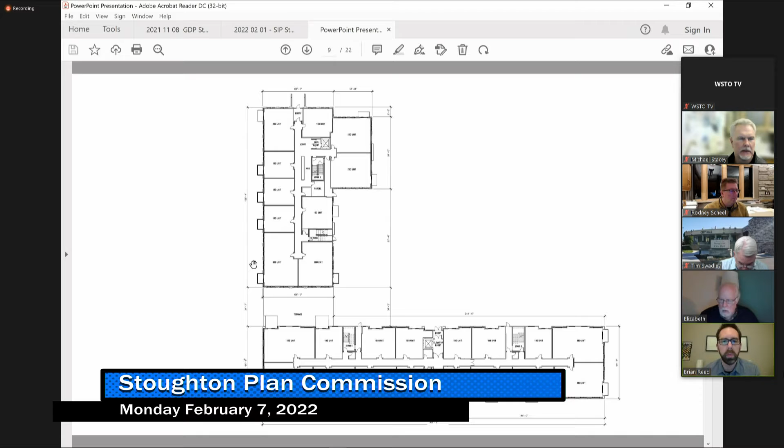The units and the building organization really haven't changed. So again, there's 30 proposed units in building 1 with the 48 units in building 2. They're pretty straightforward for the most part. The majority of the units have their own outdoor balconies or terraces if they're at grade. There's a couple that do not, but they can take advantage of the shared terrace space.

On the roof plans, we've tried to group some of the proposed mechanical systems along the spine of the building, in particular along building 2, to maximize the potential area for the photovoltaic solar arrays, so they can cover as much of building 2 as we can accommodate. And then there's some small areas where building 1 can also handle some future photovoltaic systems, dependent upon the solar orientation and solar studies, if it dictates that.

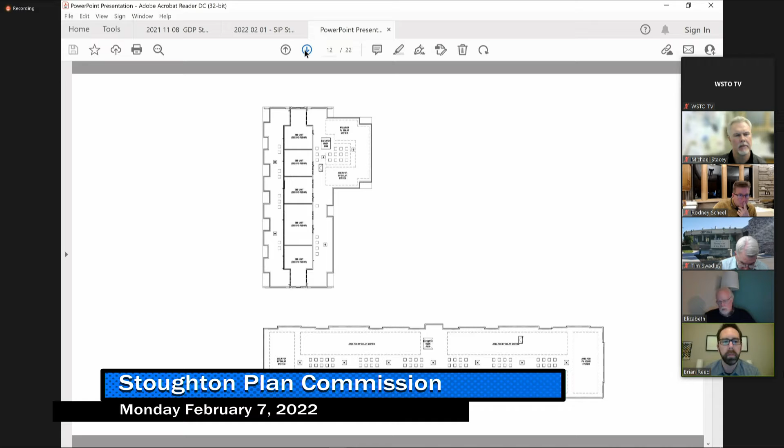So I'll show some of the imagery of the buildings. The buildings are composed primarily of brick with some fiber cement accents. This is building 1 from the corner of South and 4th Street. Again, I think the intent with this building in particular, as well as the development as a whole, was to try to create some imagery and aesthetics that recalled the industrial nature of the site. So this being the blacksmith building, as we're referring to it, has a warm reddish orange brick that has quite a bit of range to it, and then some areas of fiber cement siding on the upper floors.

Let's see. Can you just highlight the signage on that awning? Because that's the one point of discussion that we'll have later, and I just want to highlight that for the commissioners now, if you can. Sure. Yeah, so it's kind of hard to see. Let me zoom in a little bit here.

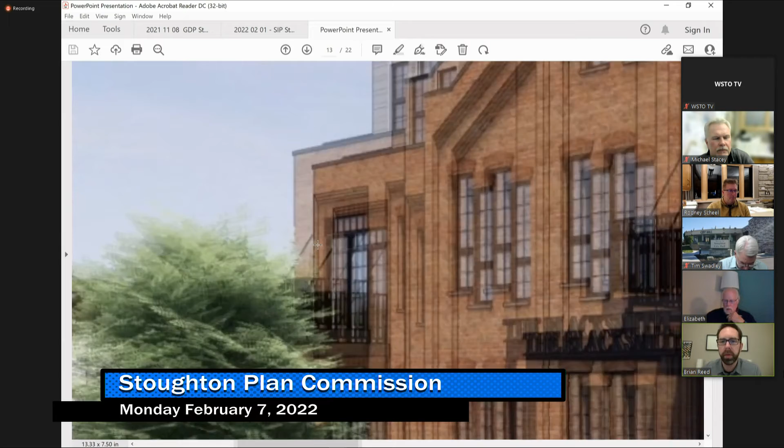Bear with me. So the thought, and this might still be a little bit hard to see, but the thought here was that we were showing some freestanding signage, some lettering above basically the entry canopy here on this building, as well as on building 2, to give them sort of identification at the main entry as to which building it is. And that would be an exception basically to the zoning.

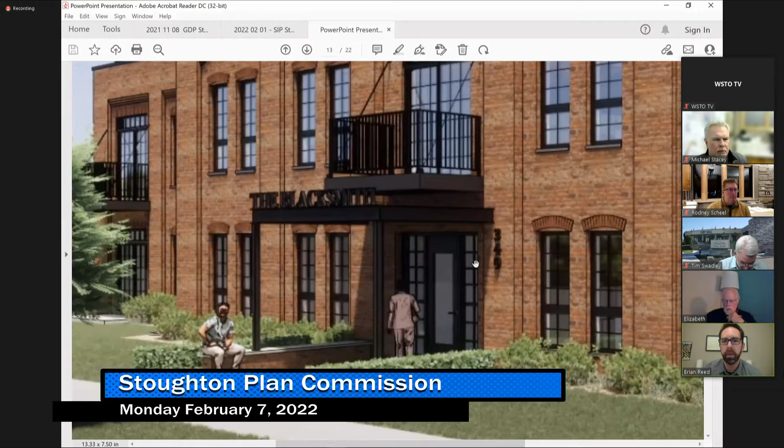In this rendering, I guess we are not showing the ground mounted sign that we have proposed here in this corner as well. But the thought with the potential ground mounted signs is that they would be more for wayfinding purposes as people are coming and going to hopefully this development, this riverfront district. And then within that, the 2 buildings themselves might have additional signage here to help identify each individual building. Zoom back. There we go.

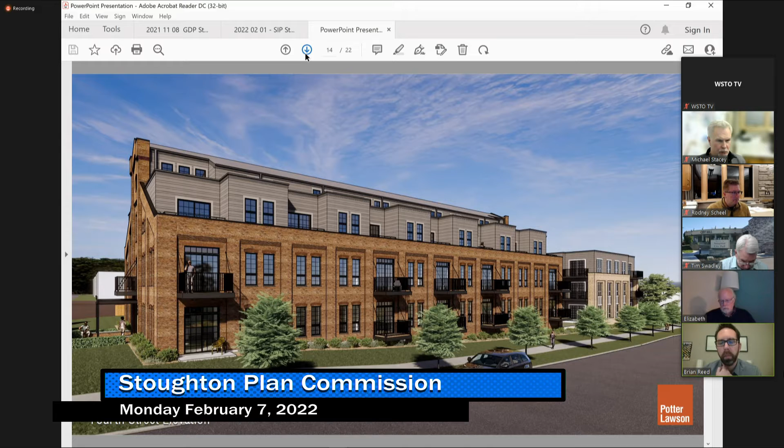View along 4th Street. The 2 buildings have similar exterior palettes. In terms of the materials, the thought is that building 1 would have the reddish brick in probably more of a tumbled character, or a little bit more of a weathered look, which relates to the sort of industrial or warehouse aesthetic that was here previously. Building 2 is thought to be composed of the fiber cement panel, but buff colored brick, so that the 2 have similar materials but don't exactly match.

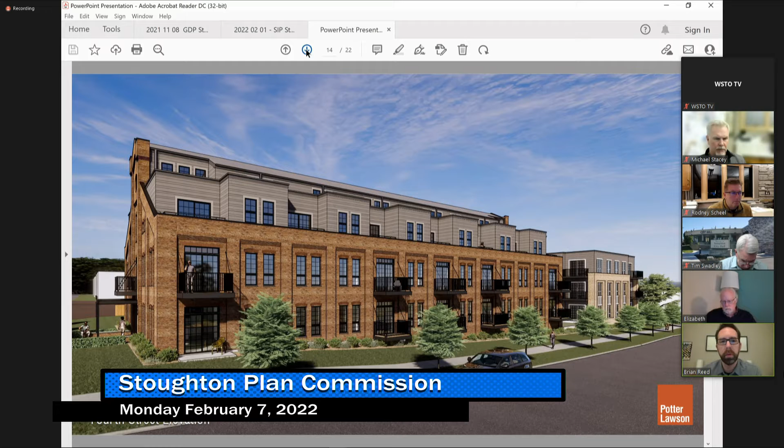View then of the main entry, and again here, if I zoom in, this is the other area where we were noting additional potential signage on this canopy at the entry to this building as well.

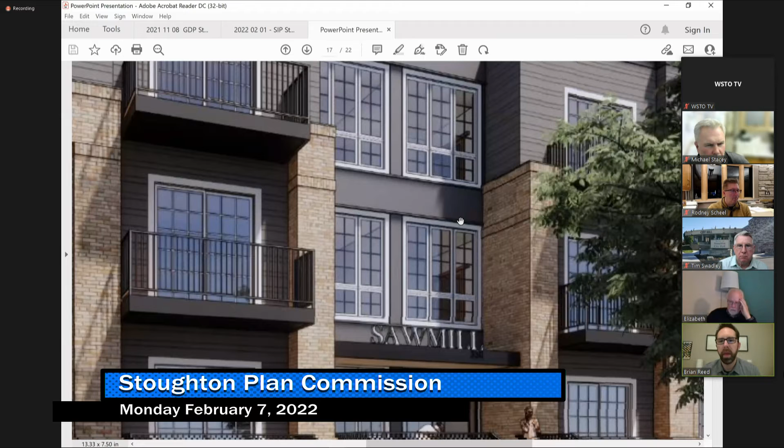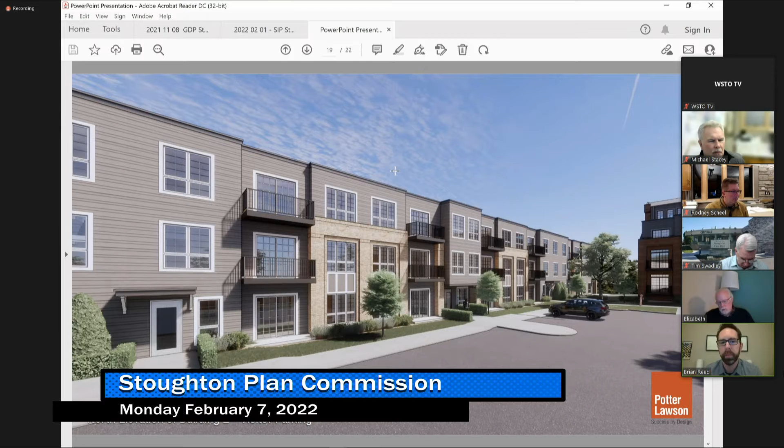And then lastly, we just had the lighting plan here, if there were any questions. It's a little bit hard to read at this scale, but the intent is to provide building mounted lights at the unit terraces and patios, and some canopy mounted lights at the main entry. On the back side, in and around the parking, there would be some low bollard lights that illuminate the walkway along the building and up to building 1 as well. And then 3 pole mounted lights to provide general lighting to the parking area in back.

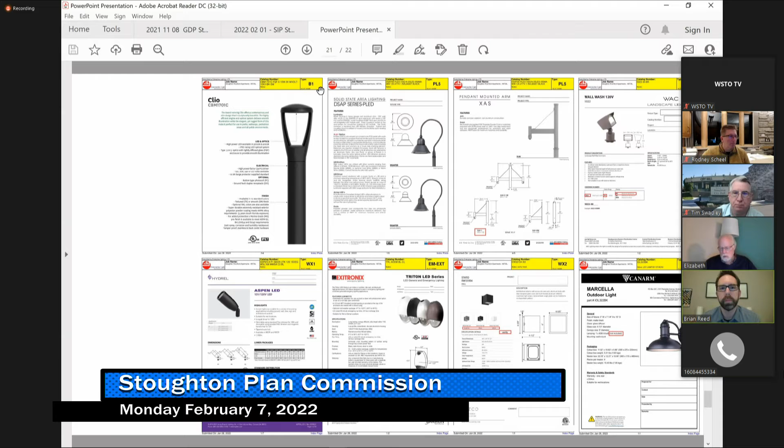And if you had any questions, these are just the examples of the lights that we had. So this is the bollard, the intent for the light poles. These I think were some of the little accent lights that we had within the development, and then some examples of the building mounted fixtures as well. And that's all that I had.

If there's any questions, we're happy to run through any and answer them as needed. All right, thank you. Are there any initial questions from commissioners?

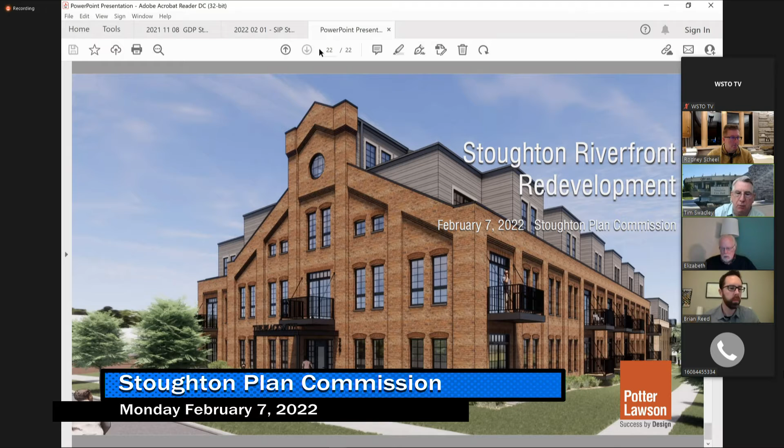I had a couple. I guess the first one is when you're talking about the larger trees, I just want to make sure that the view of the powerhouse is still there, that it won't be covered by a tree as it matures. Is that something you guys thought about? Let me go back to that plan.

So right now, I think the larger, and jump in, Abbie, if you have additional comments, but right now, most of the trees along there, just given the proximity of the powerhouse to Wagon Works Way, the first significant trees of note happen further down the street. There is one shown here at the corner, but the rest of the space around the powerhouse is very visible.

Okay, and then the other question that goes with that is that's obviously going to be a high traffic zone as far as visibility for vehicles and pedestrians and bicycles. Do you anticipate any issues with that? We do not. The intent with the landscape design, and we've worked to coordinate as best as we can with the city on positioning of the plantings, is to make sure that they're not obscuring any of the sight lines or within any of the sight triangles or vision triangles as you would come to any of the prominent intersections or areas that might cause the potential for conflict.

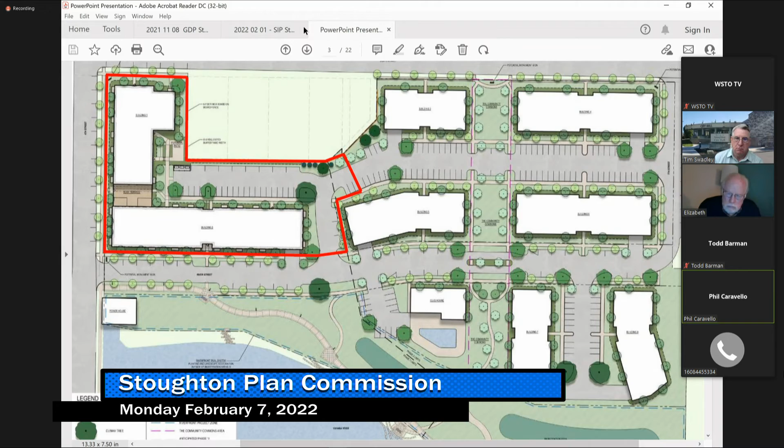Since we are on the subject of trees, and just looking at the illustration that's on the screen right now, since I can't identify what the trees are that are going to be those 5 trees that are indicated to be along the trail there, hopefully they are not a species that is a berry bearing tree or something that's going to drop berries or other things onto the trail.

Those trees are going to be selected by forestry, so I don't know what those trees are actually going to be. Okay. So just whoever, send it on to forestry, so we're not dropping some stuff right onto the trail. Otherwise, I think it looks great. All right. And Alderperson Schumacher?

Like Todd had said, and Caravello also, I do like the signage that goes over to identify the buildings individually, and I've liked the concept of these buildings from the get-go to pull the character in of the previous use on the land.

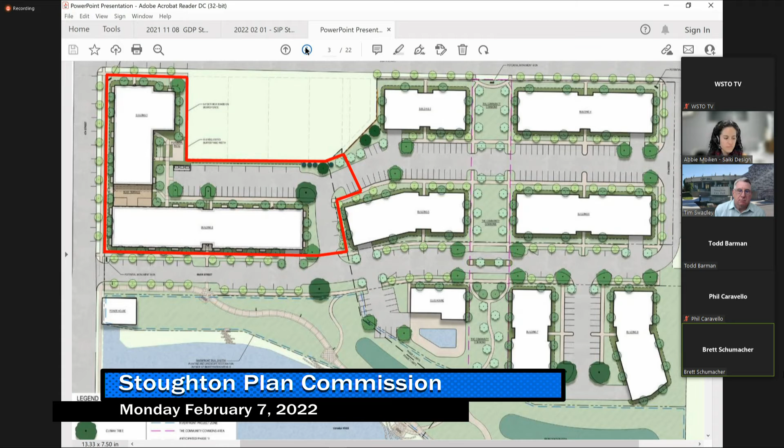I dug into some of the landscape stuff in there, and I'd say overall I'm pretty happy with the mixture and selection that they have of a lot of the smaller shrubs and trees and other plantings in there. I think that'll be a great mixture for the area. And we'll wait and see what we've got for the big trees, what the idea is on those. Other than that, I didn't have any complaints. I thought everything looked well planned out and good design.

Excellent. I don't think I missed anybody, did I? No, I had a question. Al, go ahead. Oh, yeah, sure. Did the design team incorporate CPTED? Oh, go ahead. Sorry. Yeah, I mean, that's something that we think about whenever we do planting design.

Okay. The only reason I asked is one of the architectural renderings showed some hedges near entrances that looked to be about 3 feet high or so. And from my previous experience designing Navy facilities, we always tried to keep those things down so that people couldn't crouch behind them. So I think that might have been a liberty of the architectural team, but I will verify that with them. Sure. Well, and I understand architectural renderings are not necessarily reflective of what actually happens.

So I was curious if CPTED principles were applied, and it looked like they were for the most part. So that was the only thing I had looking at the presentation. Thank you. Oh, thank you, Al. Sorry I missed you. I didn't have everybody on my list.

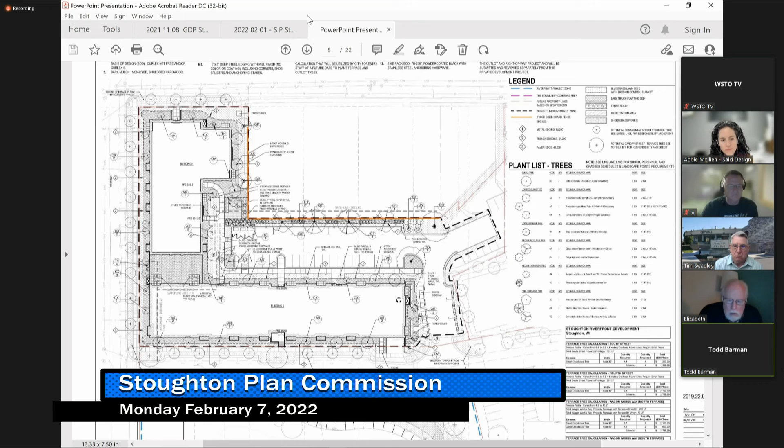One additional question that just occurred to me. Okay, go ahead. So this came up in the readings. I've been looking at this on the plan views as well, but I guess I never asked the question. Between building 1 and 2, the paved area that's over the top of the garage underneath, what kind of space is that, and how do you envision that space being used? Because it seems like it could potentially be incorporated into your plaza space, but it seemed pretty barren in some of the renderings.

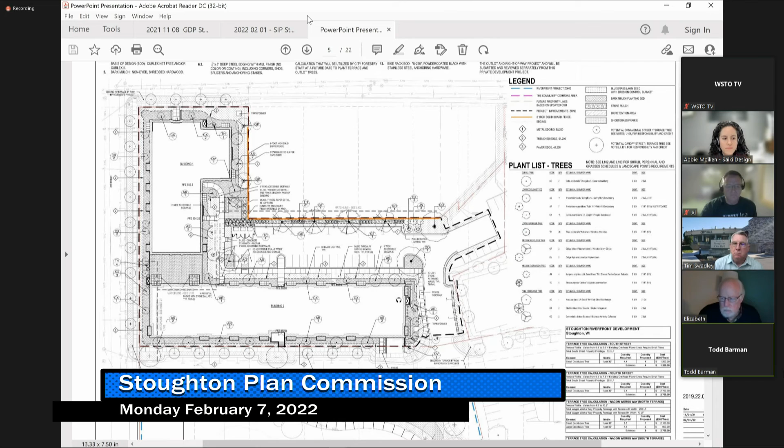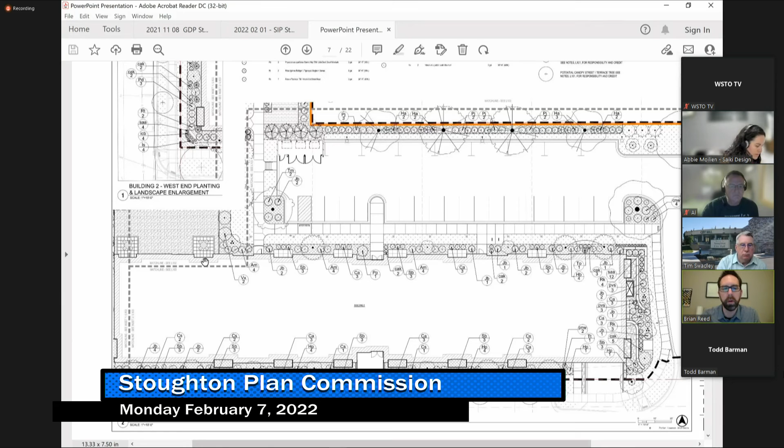Right, yes, so right now, let me zoom. I guess it's kind of falling between some of our views. Right now, the thought is that there are 2 terraces that are associated with the units. They're a little bit larger terraces for 2 of the end units here. There is a change of elevation between the buildings. So the roof structure here is basically at grade with the adjacent landscape, so that these 2 can kind of flow out and have their terraces within that space.

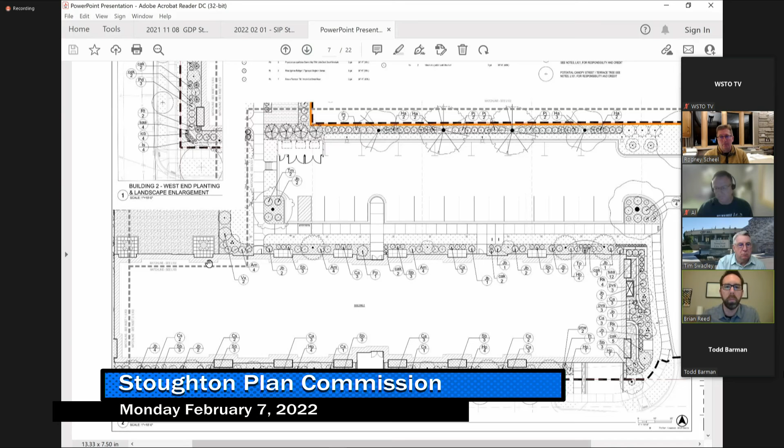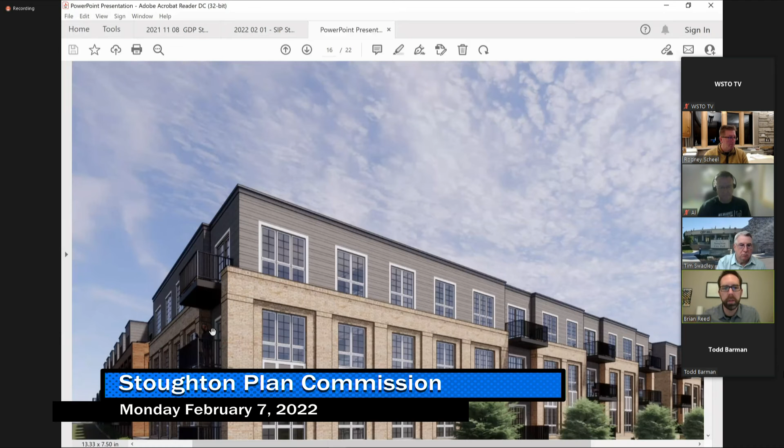The rest of the space right now is shown as a decorative stone accent area. So it's minimally planted to try to not encourage too much public activity towards those private terraces. And maybe I could jump to that rendering. The rendering might not show it very clearly either, but you can kind of see it here. There's one terrace closer to 4th Street, and then another one shown behind these plantings, and the rest is right now a decorative stone. Okay.

I will say I understand the fact that you got two units that look out on that and it's kind of their private space, but I think it might be a missed opportunity because it's kind of almost a pedestrian connector to some extent with 4th Street through there too. And it's so closely tied to your more public plaza. But I guess I can understand the privacy issue with those two units.

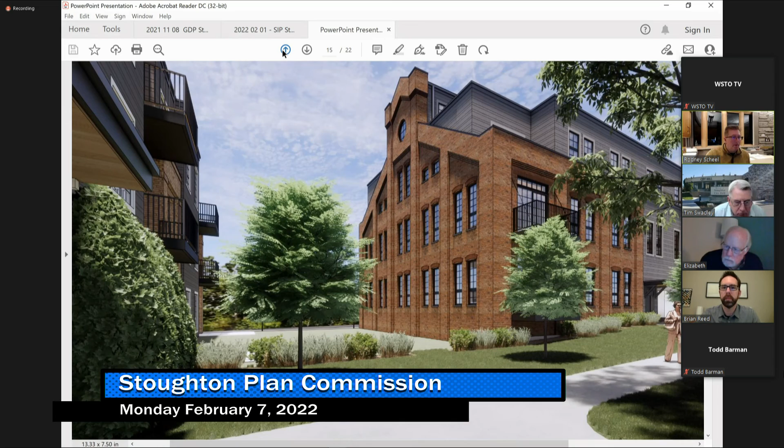All right, any other questions or comments? All right, anything else from Kurt's team that you wanted to cover? Not right now. Okay, so what are we looking for here tonight, Rodney? So in your packet tonight actually is a resolution that the Plan Commission would take action on the SIP. The resolution is written to acknowledge their application of materials and consistency with the GDP.

You'll note that we did talk about the signage that we discussed in the meeting, item E here, which really was not part of the GDP, but we certainly think that it is very suitable for this application. Therefore, the way it's written, it is trying to approve the entire package, including those two locations for the signage on each canopy of each building. So that's included in here because that's what we're attempting to do as part of this entire SIP process. Essentially, a duplicate resolution is going to be considered by the council tomorrow night, just a council resolution thereof.

Again, I thought it was a very clean review. I thought their presentation highlighted the fact that the SIP mirrored very closely the GDP submittal. And I think that was a testament to how much work they put into the GDP. They actually understood what they're trying to accomplish. With the only minor signage question that we have here, which I think we're all generally supportive of. That's really the only area that we wanted to highlight specifically outside of the GDP. Excellent, thank you for that.